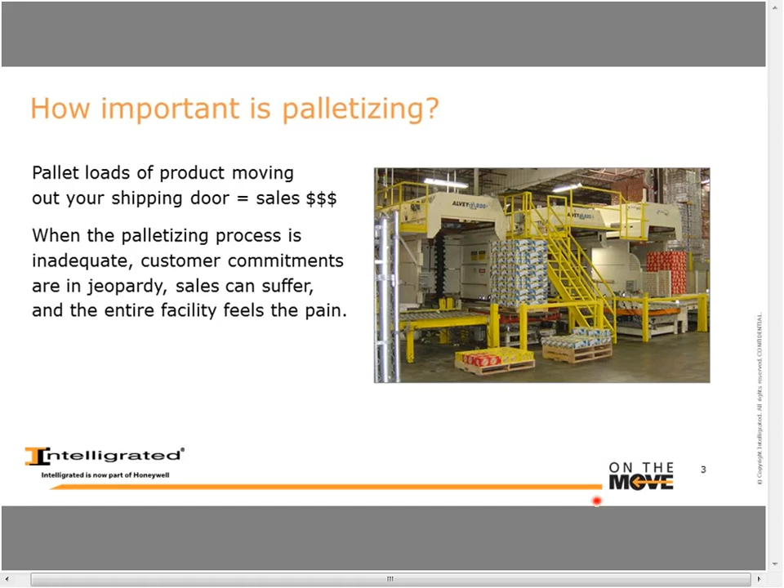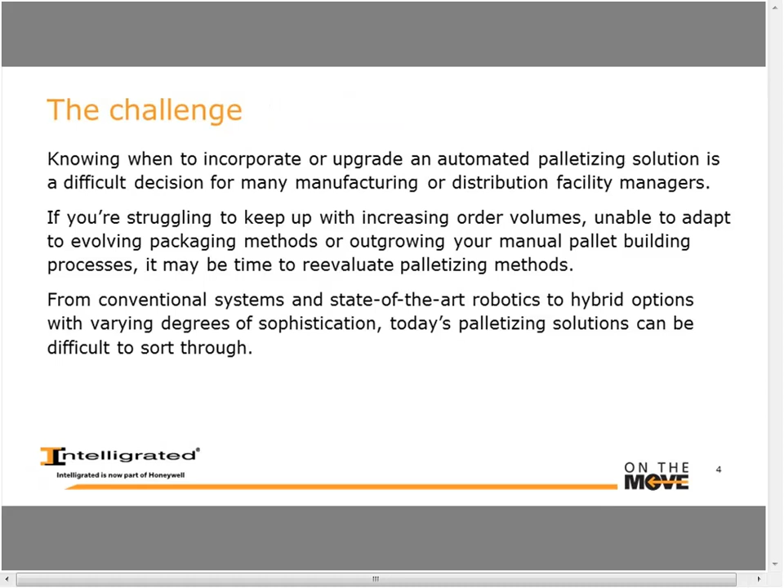So today's objective is to help give you a broader perspective and some things to think about as you're looking at either your existing palletizing operation or looking to upgrade. So the challenge is knowing what issues to focus on, how to approach an upgrade, and just simply recognizing that maybe palletizing is a hindrance to your existing operation. There's many choices today, from traditional, what we would refer to as conventional type palletizing machines, dedicated use machines. Certainly robotics plays a big role in palletizing today, and then we're seeing many applications for hybrid. We'll talk about all these in greater detail.

However, before we dive in, we'd like to hit you with our first polling question, just to get a little feedback from you. What is your current operation? Are you manually palletizing? Are you using conventional equipment, robotic? None of the above. So we'll take a few minutes. If you can click on the answer there and give us a little feedback, we'll share that with you so you as an audience can see what the prevailing solution is today. And one of the other things that we'll be talking about today has to do with if you're transitioning from a manual palletizing solution, what are the things you should consider for automatic palletizing, whether it be a conventional machine or a robotic machine. Exactly.

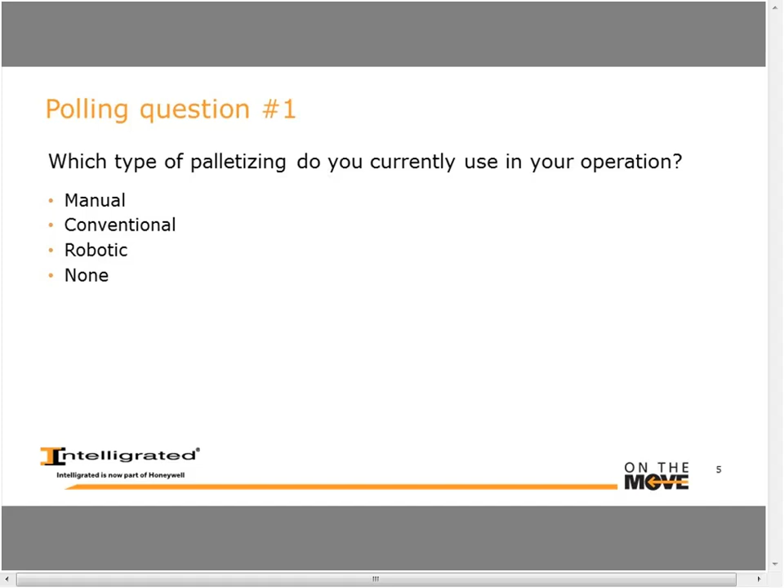And if you are manually palletizing today, as we'll talk later, there's actually some situations where that does make sense, but ultimately, wow, okay, 42% manual. I don't know if everybody can see the results on the screen, but we have 42% manual palletizing, 8% conventional, 8% robotic, and 42% none. So let's move on then to the presentation.

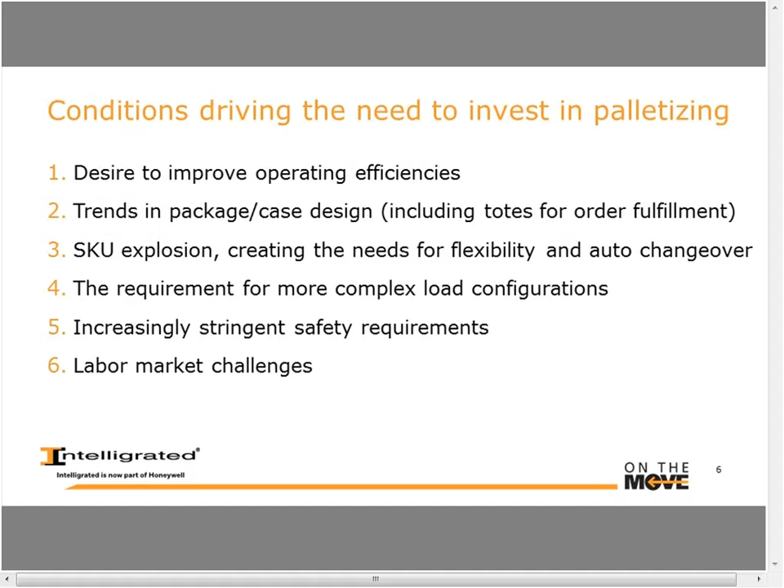First of all, there are any number of conditions driving the need to invest in palletizing. We'll talk about each one of these in a little bit more detail. The obvious one is desire to improve operating efficiency. I'm not going to step through all 6 of these here because we'll talk about each one in a little more detail.

The number one point I want to make is that when you're looking at a palletizing solution, you have to think in terms of a system. I've seen many examples where customers are dissatisfied with the current operation, and this can even apply to manual. If you have issues delivering the product to the palletizing cell or machine, it may look like a palletizing issue when really it's a system.

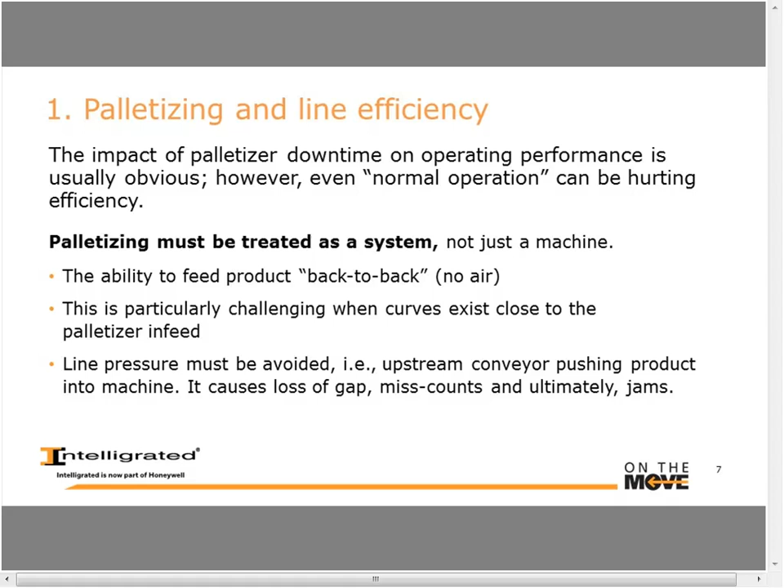For example, the conveying system must be able to deliver product back to back. That is, no gaps, no air in the flow of cases. A little bit of air can have a huge impact on performance. The layout is hugely important. If there's a curve right before a palletizer infeed, for example, that makes controlling the system very difficult and very tough to maintain that back-to-back flow. Accumulation line pressure can be deadly. So I'm bringing these up just as things to consider when you're looking at palletizing.

An analogy I like to sometimes use is think about yourself in a traffic jam and you're a case on a conveyor system. As you're approaching a stoplight, you see it turn red in the distance. You continue to travel for, say, 10 seconds before coming to a stop. Now the light turns green. It might be 10, 15, 20 seconds before you start to move again.

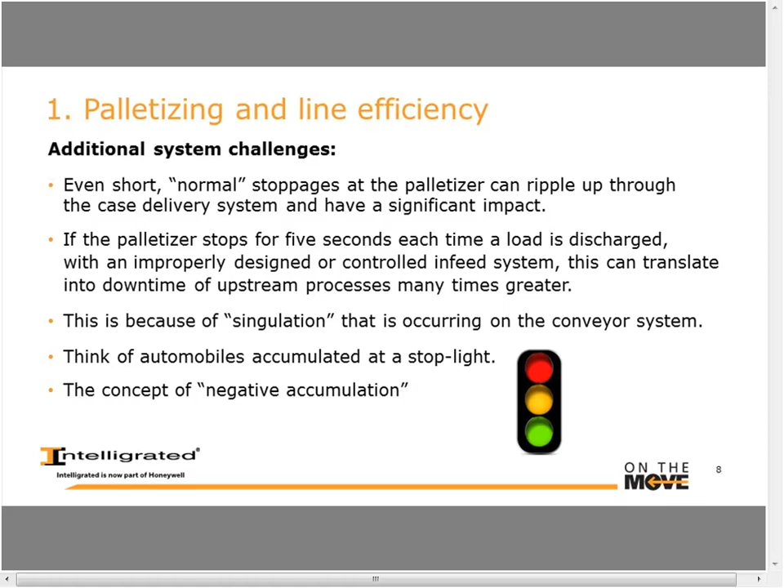This gets into the concept of what we call negative accumulation, where the time that you buy with accumulation conveyor is actually less than the time it takes to restart the upstream process. So in that situation, you're actually losing by having accumulation. It takes longer to get the last case of the train moving. So the most frustrating thing is you're at a stoplight, there's long cars in front of you, the light turns red again before you even start to move. Then you get a good idea what we're talking about with negative accumulation.

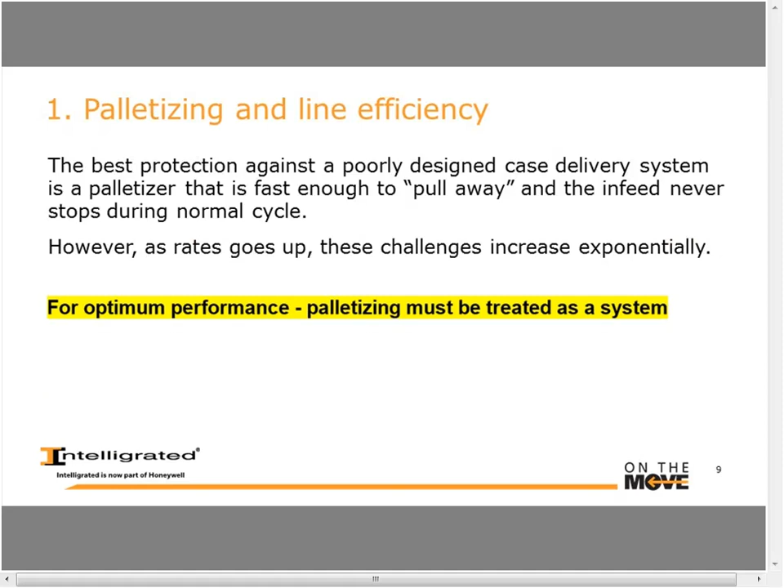So the point here is truly think about palletizing as a system. If you just focus on the machine or the robot, you could have a really good machine or a really good robot, and it's going to come up short in satisfying your needs.

So one of the interesting things here is, with the poll result being a lot of manual palletizing, this is a key factor because people can handle these wide variety of different packaging challenges really just inherently. People are very good at doing those things. To have an automated machine handle some of these more challenging packaging types really requires a substantial amount of expertise and a lot of different types of equipment to efficiently handle these things. So when you're considering moving from a pure manual operation to an automated solution, you have to take into consideration what types of product you're handling and the challenges associated with handling those products.

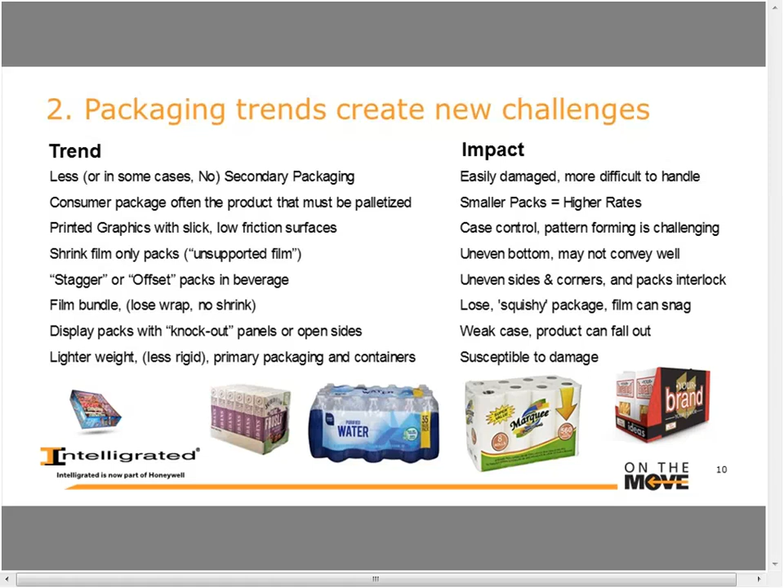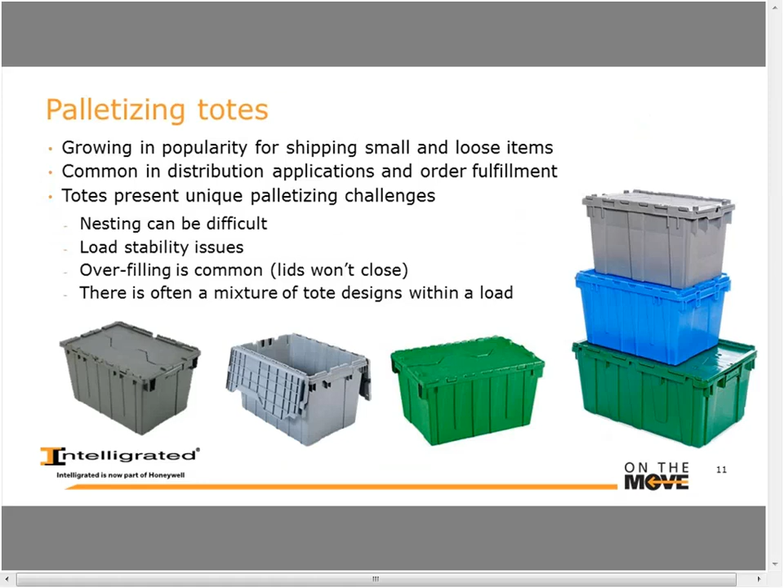Yeah, and Matt makes an excellent point, because many times today the product that is being palletized is actually the package that the consumer picks up off the shelf. So secondary packaging is virtually going away today. The other consideration is if you're in a distribution environment, we're seeing an increase in the use of totes for order fulfillment. Totes present some special challenges, and we'll come back to this a little bit later and talk about some of the viable solutions for palletizing totes, including sortation and order fulfillment.

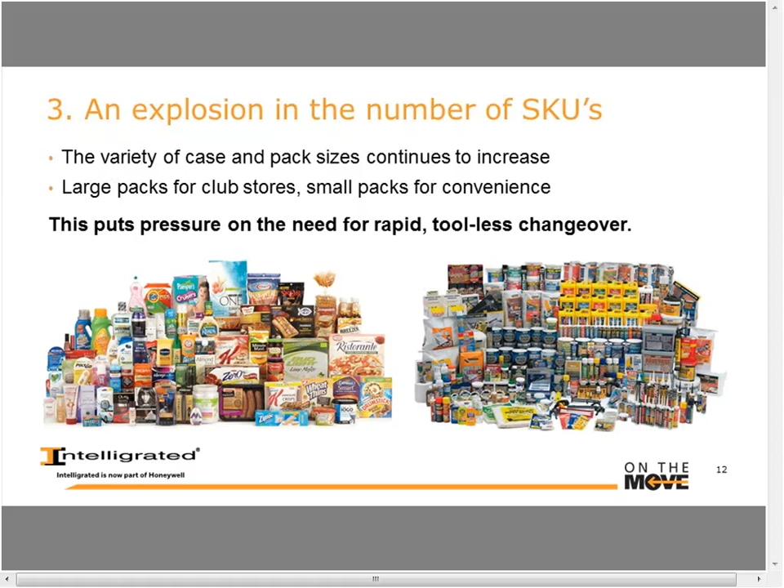It's no secret there's an explosion in the number of SKUs. This puts further pressure on your palletizing system, making rapid changeover, toolless changeover, very important. Otherwise, you spend your entire day adjusting equipment to handle other packages or other SKUs.

Number 4, because packaging is changing so rapidly, that's also having a big impact on the nature of the loads. The club stores want display loads that they can park at the end of an aisle. Very often there's a desire to have graphics to the outside of the load for display purposes. Because secondary packaging is becoming very weak or going away, often there's the need for additional dunnage in the load, such as tier sheets, slip sheets, corner boards, and then certainly labeling is very important today, tracking the product and having barcode scannable labels on every pallet load.

Yeah, again, just to re-emphasize, in a manual operation, a lot of these types of items are being addressed by the human workers.

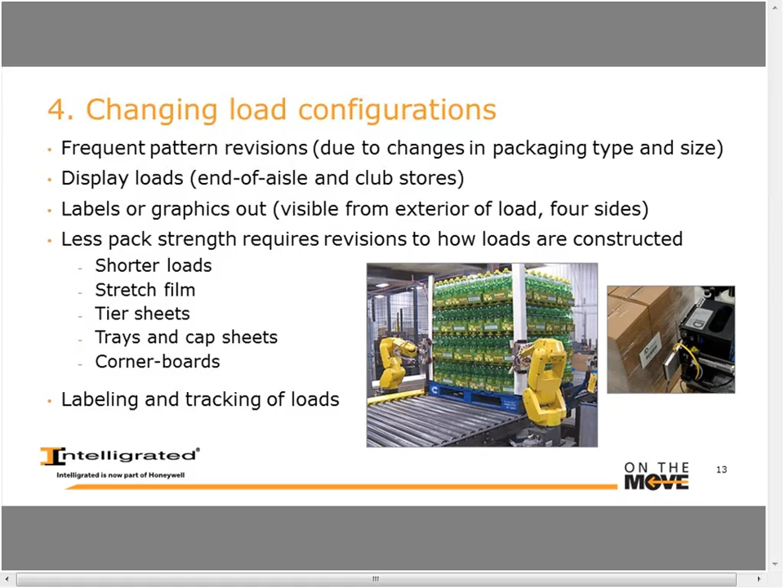Basically, all the wrapping, if there's any difficulty in handling and moving the loads around, those are all being handled by the individuals. So when you transition from that manual operation into handling those loads in an automated fashion, there's several other things that you need to take in consideration. Load stability, like what we're showing here in the picture, the corner boards are being put up there, automated wrapping systems, all those types of things really need to be considered as it relates to the load configuration.

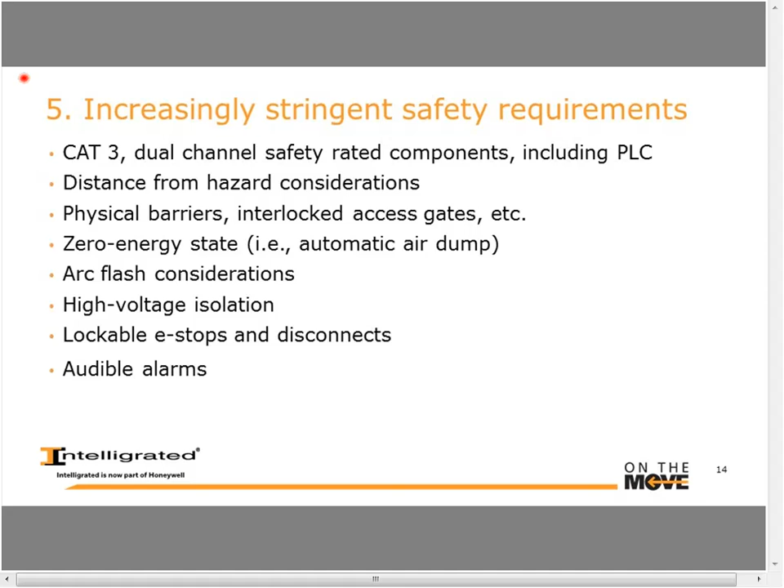One of the biggest factors today that we're seeing is evolving safety standards, not just industry standards, but many of you, I'm sure, have corporate safety standards that are evolving very rapidly. So equipment that may be perfectly functional, perfectly reliable, you're having to consider either replacing it or spending large sums of money to upgrade it. It's not uncommon today. We'll see situations where customers are having to spend $150,000, $200,000 to upgrade equipment. On the screen, you see a list of some of the typical things that are requirements today, and it continues to evolve and continues to become more stringent.

So the final item that we're seeing impacting a drive towards investing in palletizing is labor markets. Obviously, if you're manual palletizing, you know the challenges that go with that, availability of labor, the potential for increased minimum wage, and then certainly the availability. It's a job that people don't enjoy, don't like, and so keeping people on the job is tough. And then finally, there's always that risk of injury, particularly if you're dealing with a heavy product.

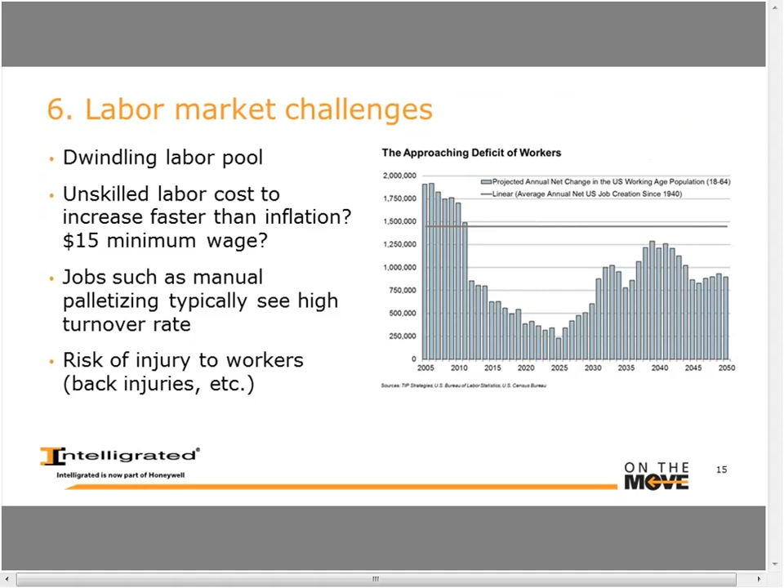Okay. Go to the poll. So let's go to polling question number 2. Of these factors, which are the ones that are driving your consideration to investing in or upgrading palletizing operations?

So I'll chime in here a little bit about the challenging labor markets. What we've seen is a lot of these labor markets are pooled around geographically dense areas, and so as retailers specifically are consuming a lot of those manual resources, a lot of the manufacturing facilities as well as the other retailers are struggling to find the labor to be able to manage the needs that they have. So automated palletizing solutions, and for that matter, other automated solutions, are becoming more and more viable.

So in fact, I was with a customer yesterday. You would think that desire to improve efficiency would be at the top of the list, as is the case here. 40% of you have said desire to improve operations. Interestingly enough, trends in packaging and SKU explosion rated fairly low here. We only had 20%. Between the two, this customer I was with yesterday, it was all about that. He sees an explosion coming at him, a wave. He knows his existing equipment can't handle it.

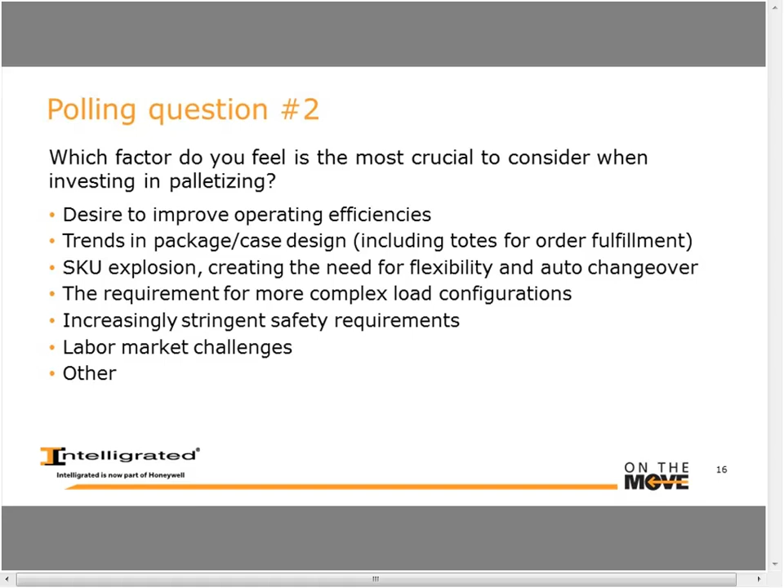So, which kind of brings up the point, maybe efficiency is your #1 driver today, but consider the future. Don't lose sight of evolving trends, the packaging changes that are going on, and the trend towards smaller packs in particular, whether it be in a DC environment or in a production environment. Packages are getting smaller and they are getting more fragile. So with that as a background, how do you satisfy this? All these objectives can be satisfied. The challenge for us and for you is to pick the right solution.

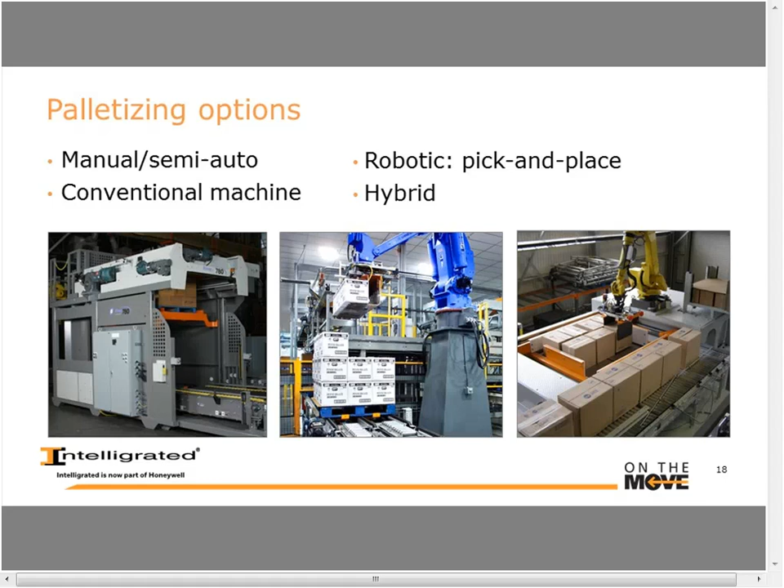So with that said, with technology today, there's many, many different viable approaches to palletizing. And manual is still a viable one in many situations, or some form of semi-automatic. But as time goes on, it's going to be more difficult to satisfy your needs with manual palletizing for the labor reasons we talked about, as well as certainly you want to increase rates, you want to increase performance. So we'll go through each one of these somewhat briefly.

On the manual side, there are advantages. It's scalable, it's flexible, it's relatively low cost versus investing in capital equipment. However, we've already talked about some of the negatives. Slow, inefficient, risk of injury, and so on. So the key on the automated side, it should be fast, it should be efficient, should be reliable, should be repeatable. And all those are true except if you pick the wrong solution. That's why I've got it in bold font there. You get the wrong solution, that's going to equal failure.

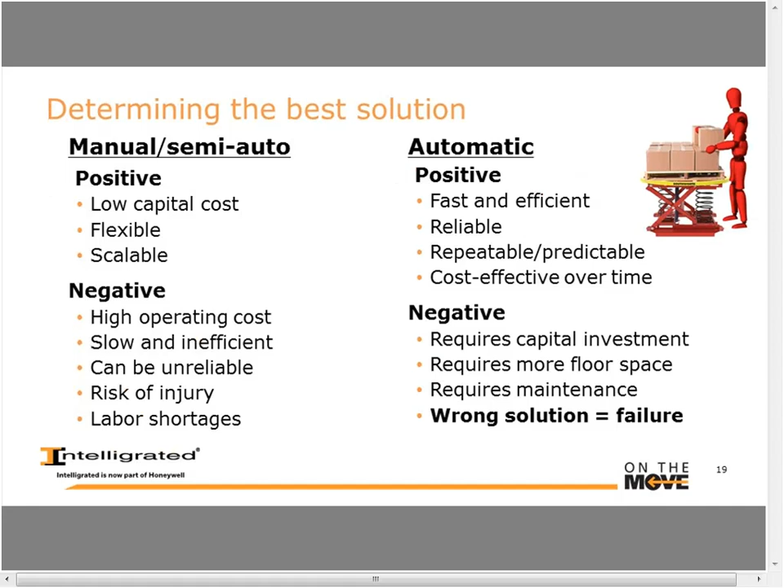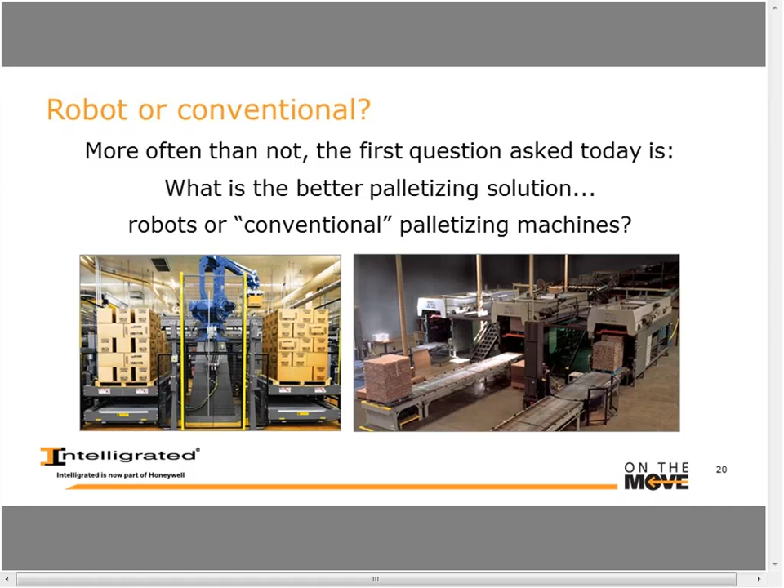And I've seen many examples where customers have invested in a robot, for example, and they consider it a failure because it's been misapplied. So we'll talk a little bit about robot application here in a moment. So with that being said, more often than not, the first question that the customer typically has is, what's the best solution for me, conventional or robotic? It's not necessarily an easy question to answer.

There's a lot of parameters, a lot of variables that go into it. But just for the sake of understanding, let's talk about what we mean with a conventional machine. There's two basic forms of pattern formation, two methods of creating pallet loads.

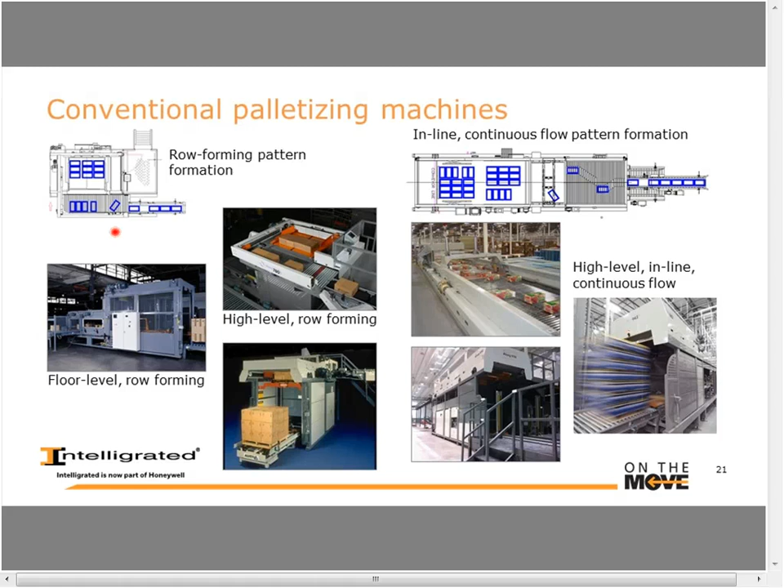One on the left side of the screen, what we call conventional row forming style, where a flow of cases is fed in. I apologize for the size of this diagram, but if you look at it here, a row is formed, cases are turned or not turned, and then one row at a time, we sweep that row out onto what we call a stripper plate or an apron and deposit it onto the pallet load. Pretty simple concept, very, very easy to understand, very reliable, very flexible. However, it's somewhat speed limited.

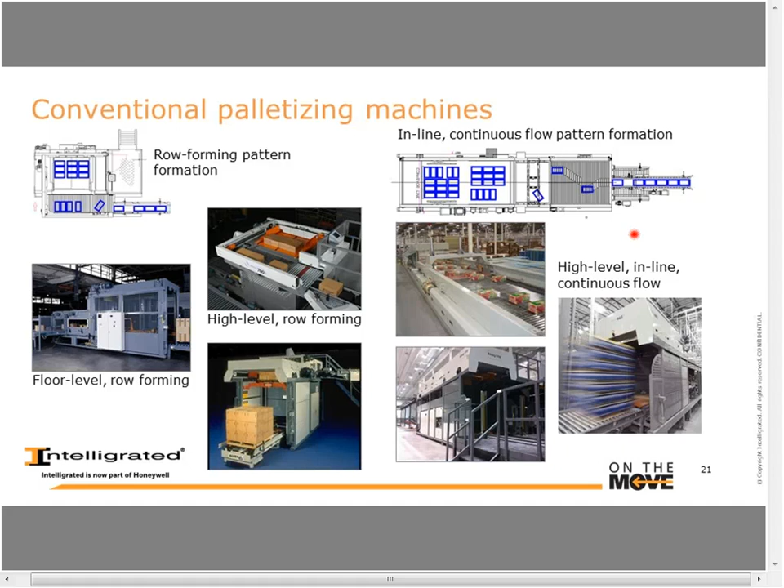If we get over here on the high speed in-line, it's a continuous flow. Patterns are formed as product flows through the machine, much higher rates, however, not as pattern flexible, not as product flexible necessarily as a row forming style machine.

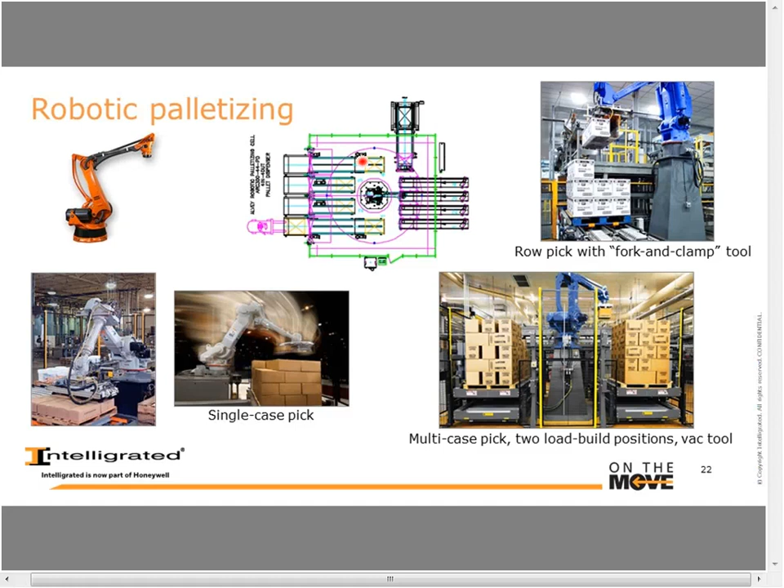So then we look at robots. Robots have huge flexibility, which is both an advantage and a disadvantage. On the disadvantage side, the layout, there's no end to the layout. So one of the tricks with a robotic solution is to come up with the right cell design. In the middle of the screen, you can see an example of a simple 4-in, 4-out cell, which illustrates one of the advantages of a robot. I can palletize 4 different products, 4 different SKUs simultaneously without the need for accumulating full pallet loads of product, for example.

Yeah, this is really advantageous if your manufacturing facility has a lot of different products that you're needing to palletize, but not any one in particular has a very high volume. And so what you're able to do with this, coupled with sortation systems upstream, would be to send an individual SKU down one particular lane and palletize it as it's being produced and delivered to the cell.

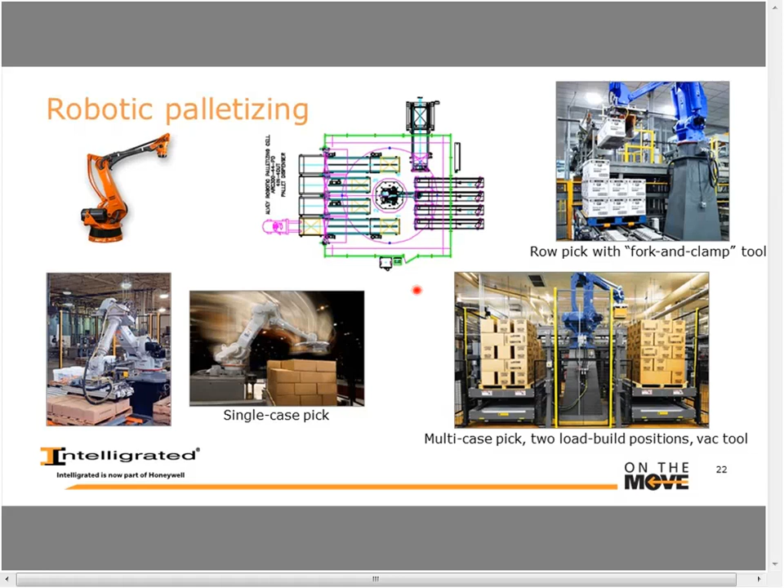And then some of the pictures here, a little hard to see the tooling, but the end of arm tooling is really key in effectively getting the most rate out of the robot, and we'll talk about that as we get into rates here. So how do you decide?

First thing is really look at the application. What are the products being handled, construction of the cases, dimensions, and then certainly rate. What palletizing rates do you have to achieve? The number of lines to be palletized. Load requirements. Do you need corner boards? Do you need tier sheets? What are the patterns? And then don't overlook facility considerations, the footprint, the size of the layout, and then personal preference. You may just have a comfort level with a particular technology.

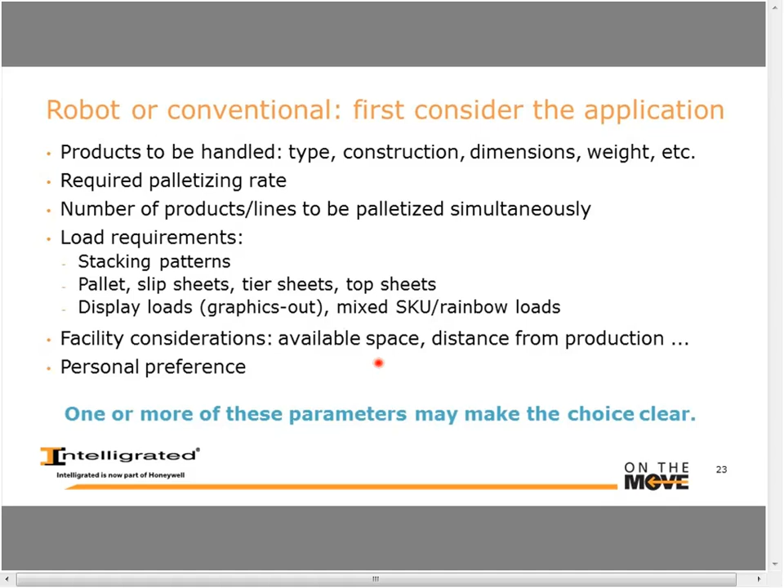Sometimes one or more of these criteria make it simple to decide, but not easy. Sometimes it continues to be a tough decision. But again, coming back, don't overlook the fact that it is a system. You got to think about the conveyance methods, the conveying equipment, how you're going to handle those products, how you're going to accumulate them, how you're going to get it to the palletizing cell reliably without product damage.

Yeah, to the point here, it's not necessarily just about the act of putting an item onto a pallet. It's all of the mechanisms to get the pallet into the machine, what the slip sheet requirements are, as well as upstream requirements of conveyance and sortation into the palletizing system.

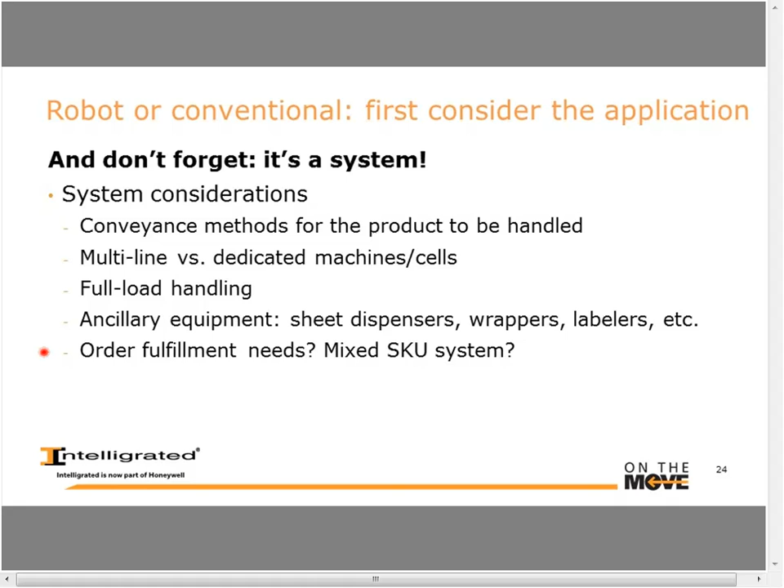And as we get into palletizing in the order fulfillment and the distribution environment, the system takes on even that much more critical importance, because sometimes we have to sequence the product, you have to sort by order, and the system is really the key in that respect.

Talk about rate, just kind of a high-level overview. Generally speaking, in a palletizing application, an industrial robotic arm can cycle 6 to 8 cycles per minute. Depending on how many units can be handled at a time, sometimes we can pick up 4, 6, 8 products, so you can do a rough calculation and get kind of a nominal idea of what type of rate you can achieve with robotic palletizing.

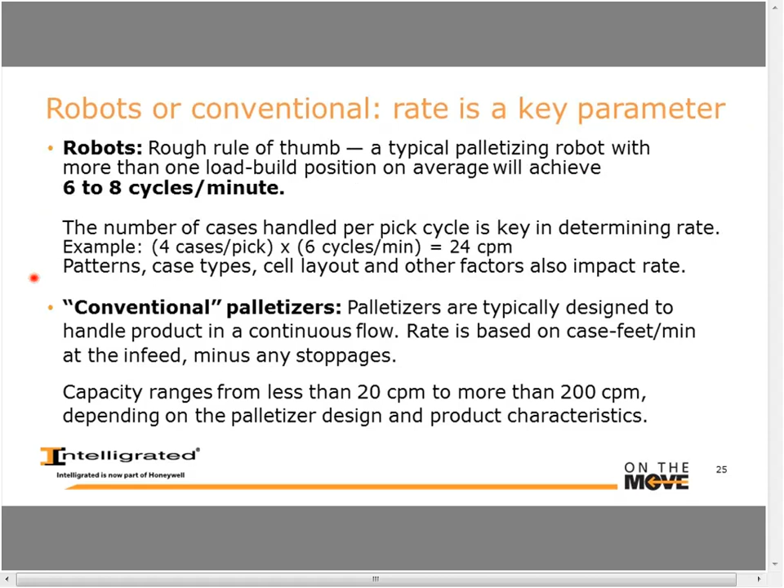Conventional, the rate range is large, ranging from 10, 20 cases a minute all the way up to 200 plus cartons per minute. So factors that would traditionally steer you in the direction of a conventional solution, rate being primary concern. Usually if it exceeds 30 cases a minute, I start thinking, well, maybe this is not a robot solution, maybe it's conventional. That being said, that's not a hard rule. The numbers vary tremendously. We have applications where we're doing 70, 80 cases a minute with a pick-and-place robot. But that's where rows are being formed and we're picking up 6, 8, 10 cartons at a time.

Robots are known for flexibility, and they are flexible, but only as flexible as the end-of-arm tooling. So in many applications, the conventional machine can actually offer you greater flexibility if you're handling display cases, cases that don't provide a good surface for picking up with a robot. So you've got to think about the long-term flexibility.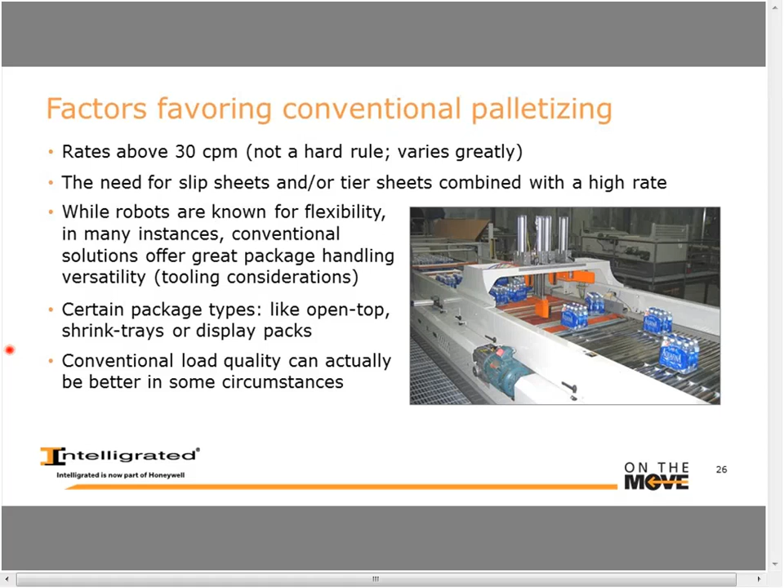And beyond that, load quality. Sometimes, again, depending on the nature of the product, you can actually get a little bit tighter load, better load with a conventional machine because of the compression dams, and we're actually squeezing the layer as it's being deposited onto the pallet.

As far as robotic palletizing, absolutely, if you have multiple slow-speed production lines, it's almost a no-brainer. Robots are clearly the way to go, because with a conventional machine, while you can satisfy and service multiple lines, you have to accumulate full pallet loads of product and release it to the machine in what we call a multi-line type application.

If the rates are low enough, another advantage is the robot can pick the pallets, put them in place, handle tier sheets, so you're saving equipment by having the robot handle the materials that go into the pallet load. And then items like bags. If you're palletizing bags today, a robot is absolutely the way to go. It's not uncommon to get 20, 25 bags a minute out of a single robot.

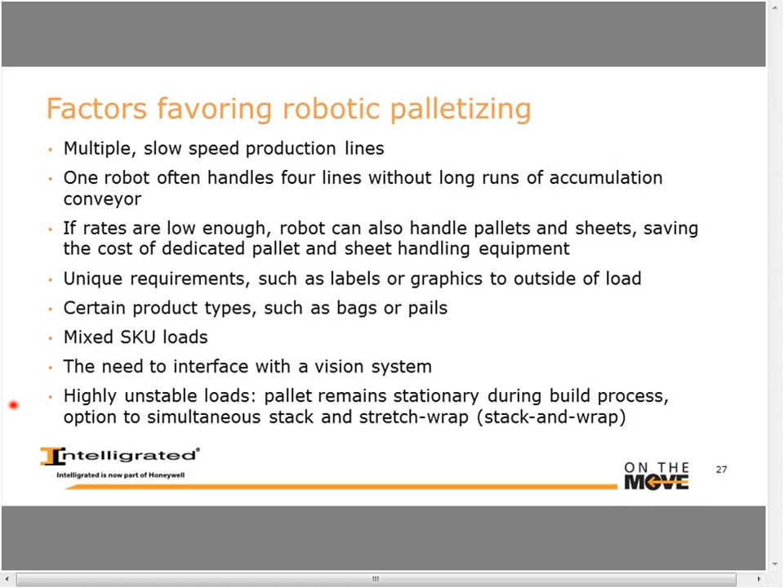And then if we get into vision-related applications, mixed load palletizing, depalletizing, where vision comes into play, the robot is absolutely the right solution. The final bullet there, we'll talk a little bit in a minute about very unstable loads. The robot gives you a very good way to stack and wrap the product simultaneously by literally stacking loads on the turntable of a stretch wrap machine.

So one of the key things, if you decide, okay, robots for me, that's how I'm going to do it, you've got to pay attention to the integrator. There are hundreds, literally thousands of companies integrating robots. Not all robot integrators are created equally. Matt and I could decide tomorrow we're going to be robot integrators. In Matt's garage, we'd throw a robot together and put a vacuum tool on it, and we're in business. You've got to be careful about that.

Size does matter. You've got to make sure the company has the resources to support you. And look for RIA certification. Maybe you want to expand on that a little bit, Matt. Yeah, the RIA has a certification program that qualifies the robotic integrators through a series of tests and criteria. Essentially, it's establishing a higher level of comfort for individuals or companies purchasing robots, that their integrator is qualified and competent beyond just what you hear from the integrator.

So let's talk about hybrid solutions. The hybrid can kind of give you the best of both worlds. It takes robotic technology, combines it with conventional, and the idea is to capitalize on the strengths of both solutions. Now, usually a hybrid solution is more expensive. And by the way, this applies not just to palletizing. You see it in case packing, stretch wrapping, any number of technologies. And it can make sense beyond just the coolness factor that comes with it.

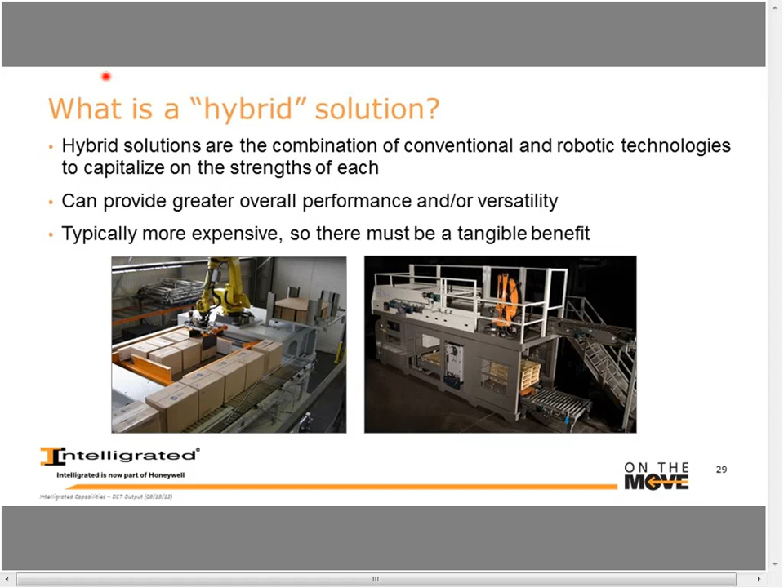Hey, Frank, can you give an example of a product that would lend itself more towards a hybrid palletizer versus a conventional or robotic? Absolutely. When we get into packages that are very small, very unstable, very fragile, forming those difficult patterns on a conventional machine can be quite difficult, and sometimes the package handling reliability is not there. So a hybrid offers the precision and repeatability of the robot, along with the speed capability and layer handling capability of a conventional machine.

So certainly repeatability, flexibility, accuracy, those are all factors that go into considering a hybrid solution. Another benefit is we see many examples today where customers want a particular side of the package on the outside of the load, either a label or graphic display. The robot or the hybrid gives that capability basically free. It's built in, whereas on a conventional you're going to have to add additional hardware to the machine to achieve the label-out orientation.

Another advantage of either robotic or hybrid is that we have software, and Matt, I think you're going to touch on this, that allows the end user to program new patterns through the HMI. You don't have to come back to the manufacturer. The software allows you to add those new stacking patterns.

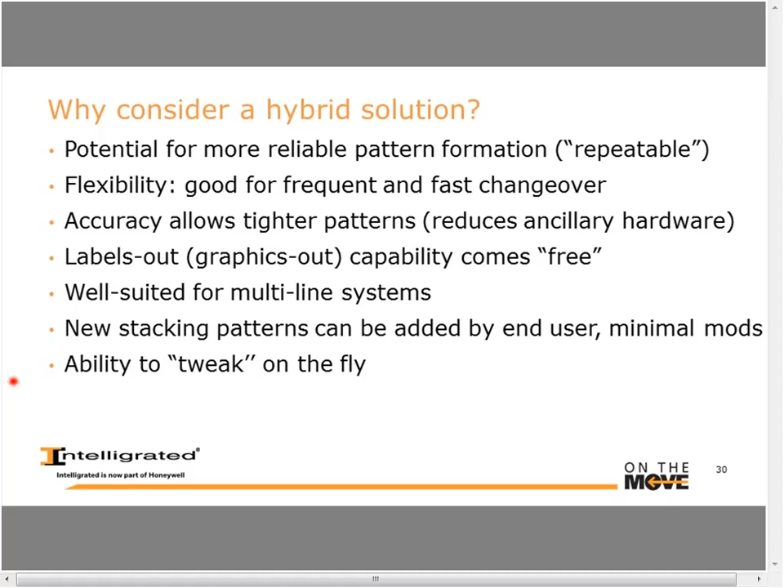And the patterns can be tweaked, I say, on the fly. So if a particular package is not handling to your liking, adjustments can be made right through the HMI as the machine is running to dial it in with the precision that is needed.

Here are a couple of photos just to illustrate, and up in the upper left-hand corner is a pick-and-place robot stacking onto the apron of what would otherwise look like a row-forming style palletizer. The advantage here is you get label-out orientation, you get a nice tight load because of the squaring dams on the machine, and at the same time the robot can apply the tier sheets between layers as needed.

Here's what I kind of call a King Kong size hybrid machine, a pair of FANUC robots on a high-speed inline machine handling very large boxes of beef with the ability to put the labels to the outside and actually build mixed loads, order fulfillment loads at a very high rate. I might mention that the robotic technology can either be industrial arm like a FANUC or a dedicated use gantry type device, and that really kind of comes down to personal preference.

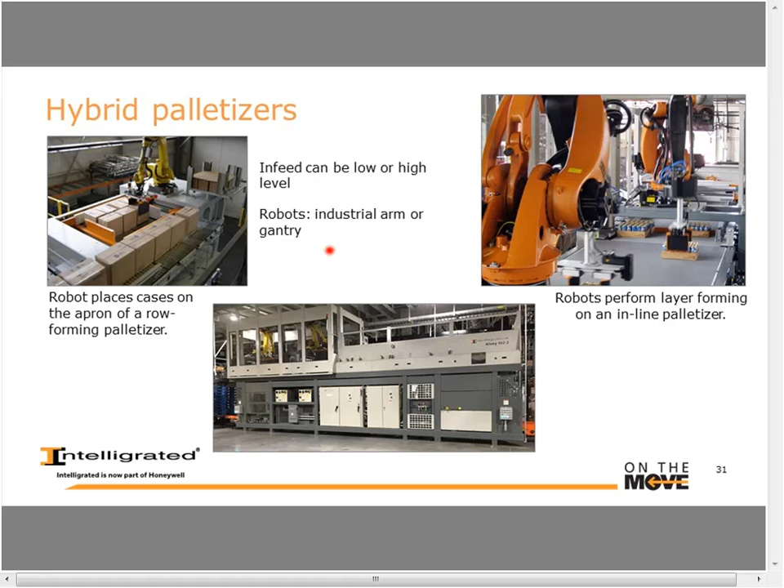So when you say order fulfillment load, what you mean by that is a specific set of products are dedicated for a particular distribution channel, like you're building a pallet out for a particular order with a known set of products on that pallet. That is exactly correct. The mixed load, mixed product, mixed SKU, and even mixed case sizes, and the hybrid gives you that capability.

So I'm going to put this chart up, and you say, well, golly gee, you're kind of talking rates, you're talking footprint, talking flexibility. Where do I start? Again, I'd start by looking at the rate. Now, this chart is not intended to be the ultimate guideline in terms of what the capabilities are of these various solutions. It's simply to give you an idea of what the capabilities are.

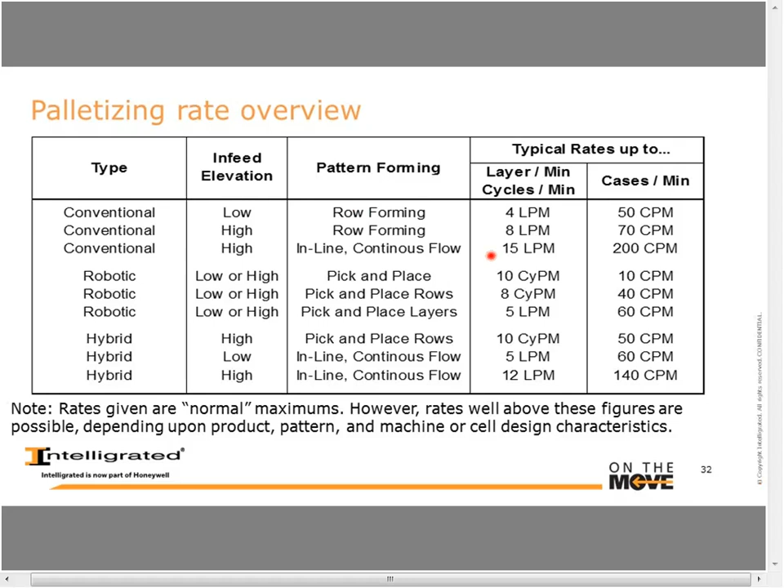So for conventional, low in-feed elevation, we're typically talking in the range of 4 layers per minute at maximum. You go to a high-level row-forming style machine up to maybe 8 layers per minute, or in terms of cases per minute, 70. With the high-speed inline, we see applications where we're doing 15 up to 20 layers per minute, or 200 packs per minute.

Robotic, pick and place, again, think in terms of 8, maybe 10 cycles a minute for a really tight, well-laid-out cell. But again, to try to define that without looking at the specific application is very difficult. And then we get into the hybrid solutions. So you can use this as a reference, but certainly don't make any investment decisions based off this chart.

So another one of the things we talked about earlier was the different packaging types and other product requirements, and so those are all also impactful to the rates of all of the different types of machines that you've talked about here today. So back to emphasizing on selecting the right supplier or integrator for these solutions is you've got to take all these things in consideration when engineering a robotic palletizing solution.

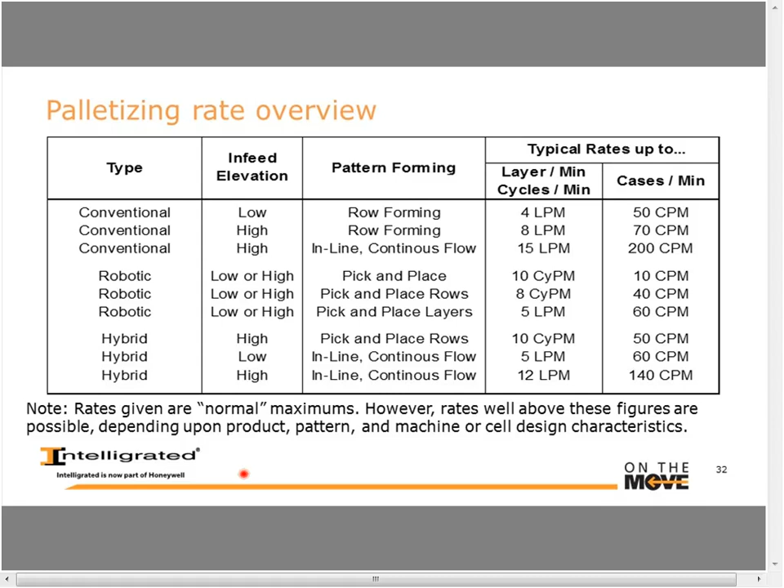Absolutely. So a couple other things. I haven't mentioned cost. Usually that's at the top of everybody's list. Well, what's it cost? If you say, well, what's the robot cost? What's the palletizer cost? It depends. There are a million variables that go into that, the system being one of them. So you need to look at the entire solution. Sometimes they come out darn near equal. Robot, hybrid, conventional, because of all of those variables, you put it in the hopper and it comes out where the cost is nearly identical.

So then what do you do? Well, look what's going to serve you best long term. For your environment, your building, existing equipment, what are the capabilities of your facility in terms of maintenance operation? Are your people well skilled in robotics already? Then robots would be a simple decision. If you're more into PLC technology and just conventional machinery, well, then you might want to lean in that direction.

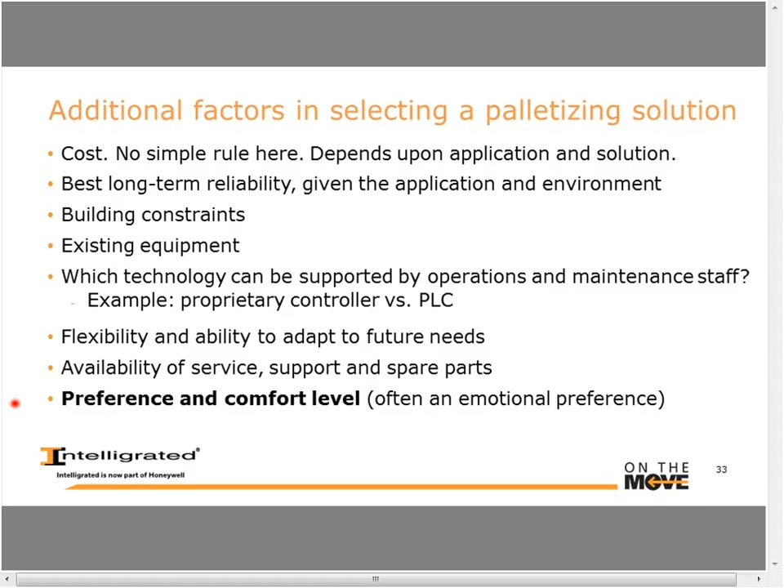Again, don't forget about future needs, flexibility, and then long-term support. As Matt was talking about the integrator, can you get that support and upgrades and so on for your equipment long-term? Sometimes it just comes down to this, the comfort level that you have. It could come down to a gut feeling. What do you feel serves your needs the best, if all other factors are equal?

Yeah, so one other thing that I wanted to chime in here is the first bullet point you have is cost. Also focusing on the value that you get for that cost, because there are a wide variety of different costs associated with palletizing solutions, and certainly there are some very low cost but low value solutions.

And so compare not only just the cost but also be very detailed on the different functionalities and the different features associated with the different solutions that can be provided, because even though the low cost may be low cost, it might not really get you what you need.

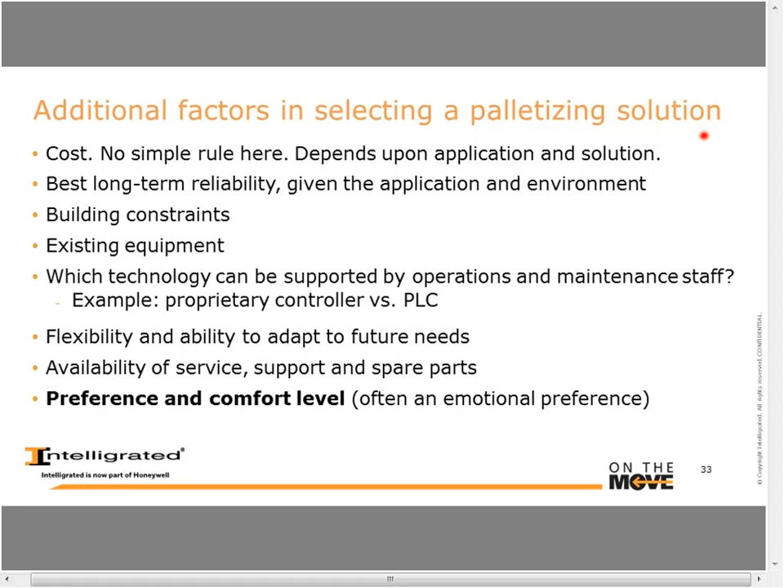So, Matt, that is a great point. And we've seen many, many examples where someone decided to go with their low-cost solution only to be stung long-term by that. Yeah, and not recognizing a lot of those challenges that you've articulated here quite nicely. If you don't recognize and don't build those into the solution, you can get that low cost, but the value is not going to produce the solution that you need.

Exactly. So order fulfillment, we'll say a few things about this. Palletizing in a DC, order fulfillment. I mentioned earlier that we're seeing an increase in the use of totes. Totes provide a great mechanism for shipping goods that are in a picking operation. What we typically do is sort by orders into buffer lanes and release those orders to a palletizer.

Now, on the surface, myself included, I'd immediately start thinking in terms of robots when I stack totes. However, what we find, given the rates involved and some of the challenges that go with tote handling, actually the conventional machine has some distinct advantages. So while we've palletized totes with robots, typically we will apply a conventional solution.

This is a very small illustration, but just to show you, what we have is a sorter, high-speed sorter, come off into buffer lanes, accumulate by order, and then release those orders to a central palletizing area. And those orders or those loads would receive a label that would be applied to the load.

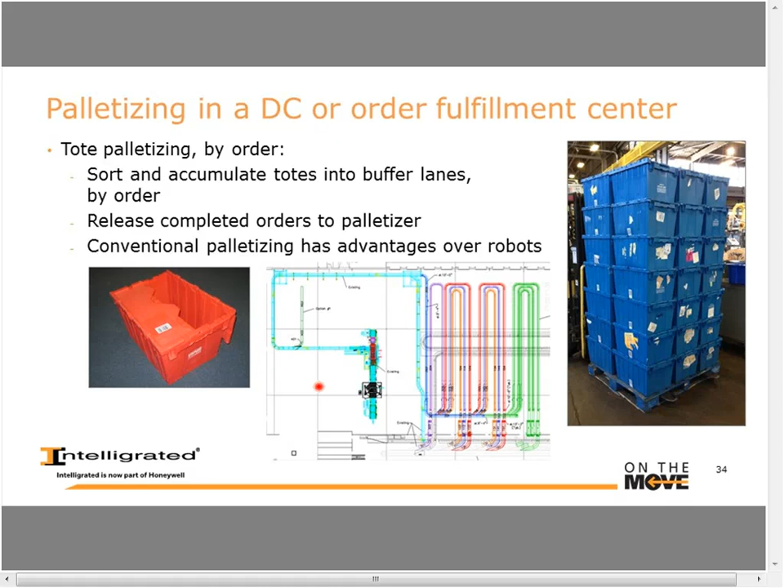So if not totes, in an order fulfillment or distribution environment, the holy grail is mixed SKU, and that can range from very simple uniform case size, but different flavors, different colors, or whatever. Conventional machine can handle that just fine, as well as rainbow loads, where each layer is different, similar to the meat distribution job that we showed you a minute ago.

But we mix within a load. Taking it up a notch in terms of complexity, sometimes we'll use what we call starter loads. So the first 2 or 3 layers may be homogeneous based on the order, and then stack the cats and dogs on top, either manually or automatically. And then we work our way up all the way to total mixed random loads, where the technology exists, but the system cost can get up there pretty good.

So we're still, I'd say, in a time frame here where ROI can be difficult, but as technology continues to evolve, labor costs can continue to go up. We are seeing viable applications for total mixed SKU palletizing.

Yeah, as Frank mentioned here with the mixed SKU palletizing solutions, generally speaking, there is a lot of additional hardware beyond just the palletizing piece to make that solution come together in an entire system. You've got ASRS, you've got depalletizing solutions, you've got order release modules, and then you have some complex stacking algorithms to actually be able to generate that. So generally speaking, those are very high volume, very, very costly systems.

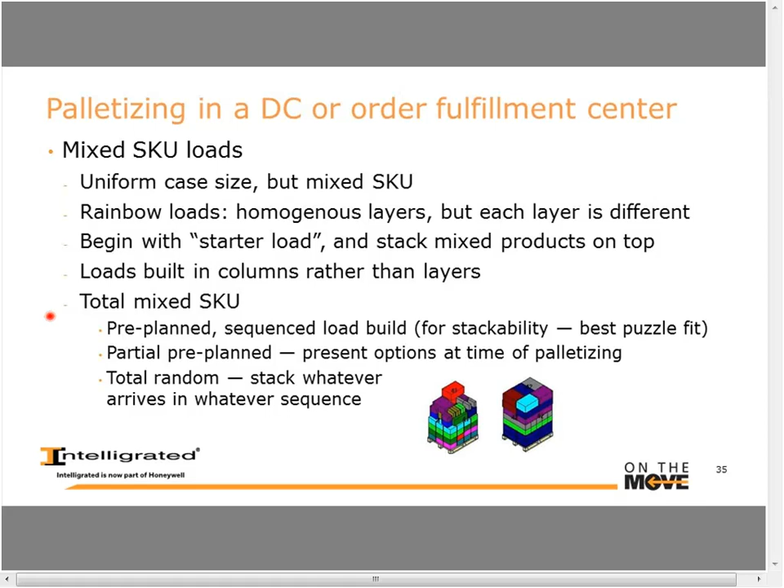Those scenarios are generally large companies that would merit that. It's not like you're going to have somebody that's going right from a manual palletizing solution into a complete mixed load order fulfillment solution. Now, with that being said, there are ways to improve.

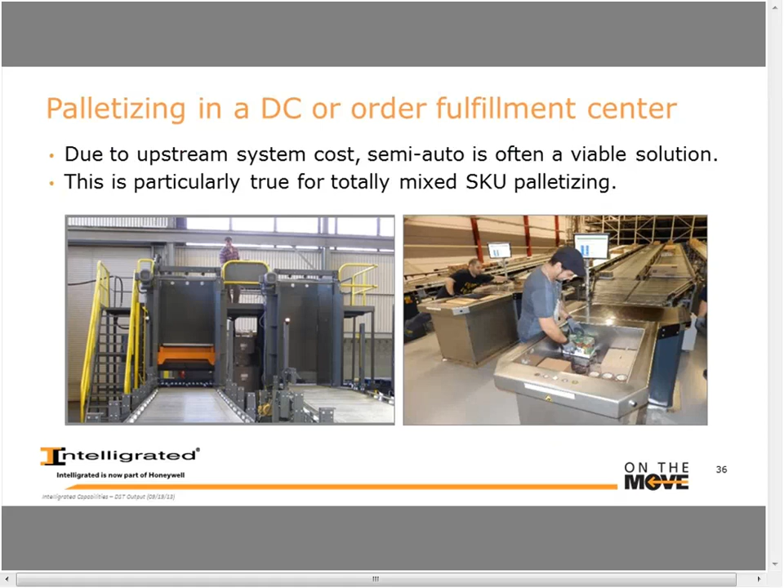Let's say you say, yeah, I've got to continue to manually palletize because I got total random. I just can't afford the millions of dollars that are going to be required to automate my palletizing. However, you still typically start with donor loads that have to be broken down, so maybe just automating the depalletizing side is the way to go.

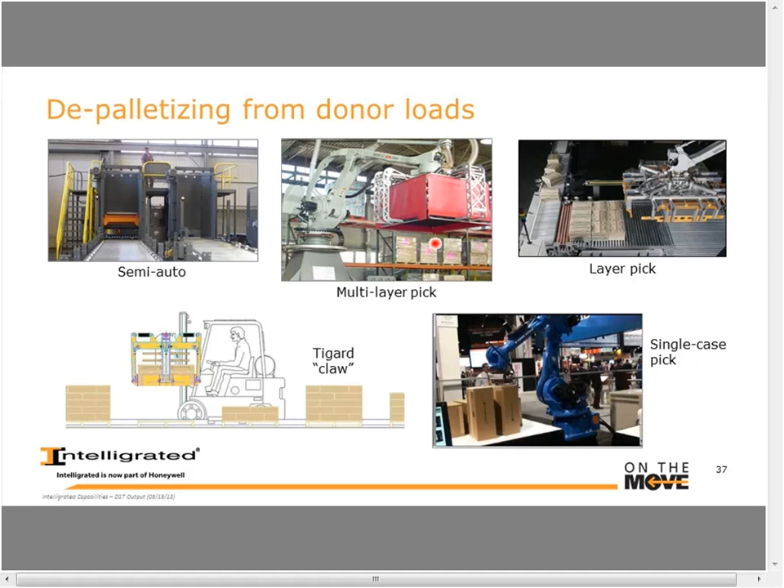So if I step to this slide here showing different methods of depalletizing, ranging from a semi-automatic approach to picking multiple layers off and unscrambling those layers, or even a vision-guided single-case depalletizing type operation. Yeah, we could do a whole webinar series just on depalletizing alone here. That's exactly right.

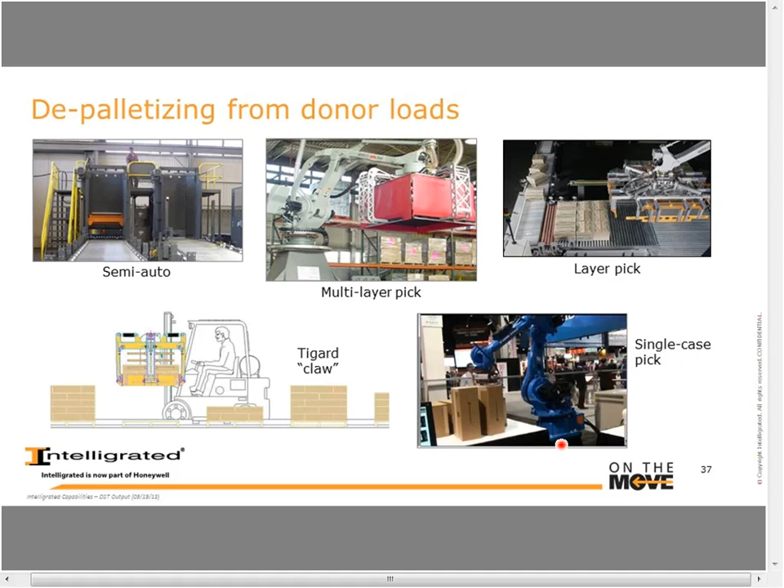So we've mentioned software a couple times. Let's talk a little bit about the importance of software and some of the options that are available. Yeah, so one of the considerations that you have when you're evaluating these palletizing solutions is a common user interface versus a dedicated user interface.

A user interface is, generally speaking, set up to configure your pallets and configure your products. There are solutions out there that have offline software that allows you to configure your pallet loads. Other solutions out there have a very cohesive, integrated solution to allow you to configure your pallet loads and your layer types on the machine itself.

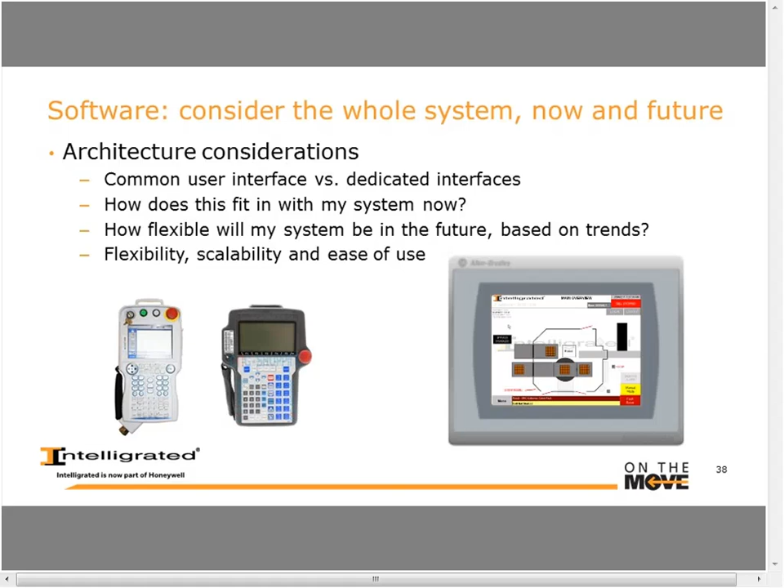As I mentioned before, too, the integration of the software with the WMS or WES is very critical to the overall application. As we mentioned with mixed load palletizing, it's not just a matter of putting the mixed load product onto the pallet. That's the tip of the spear. The remainder of this is all of that integration with that software to provide that solution.

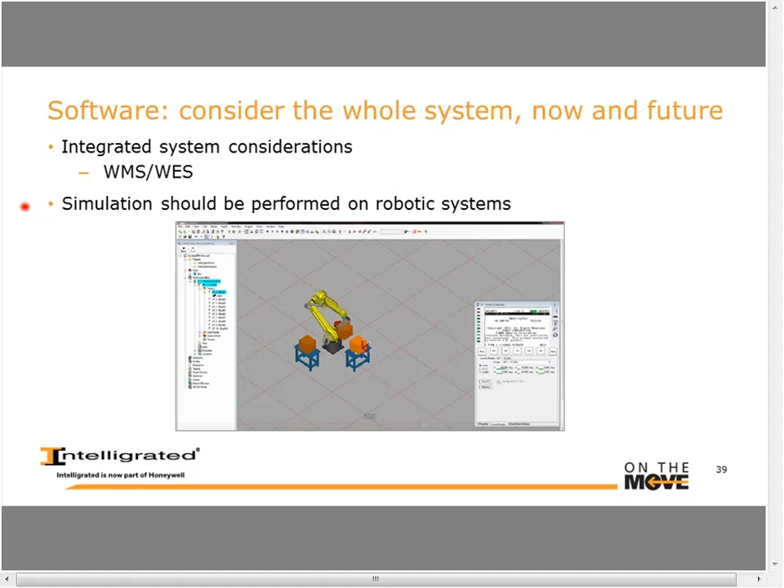And the ability to simulate as you get into more complex, whether it be robotic, palletizing, or mixed load, simulation is a key capability, which goes along with selecting the right integrator. Yeah, absolutely. Generally for lower slow speed applications, you may not necessarily need to do it on every single solution, but when you're pushing volumes and pushing rates on these things and there's any doubt that you're going to be able to do it, having a software simulation performed on your solution is very valuable and can lead to some very insightful information.

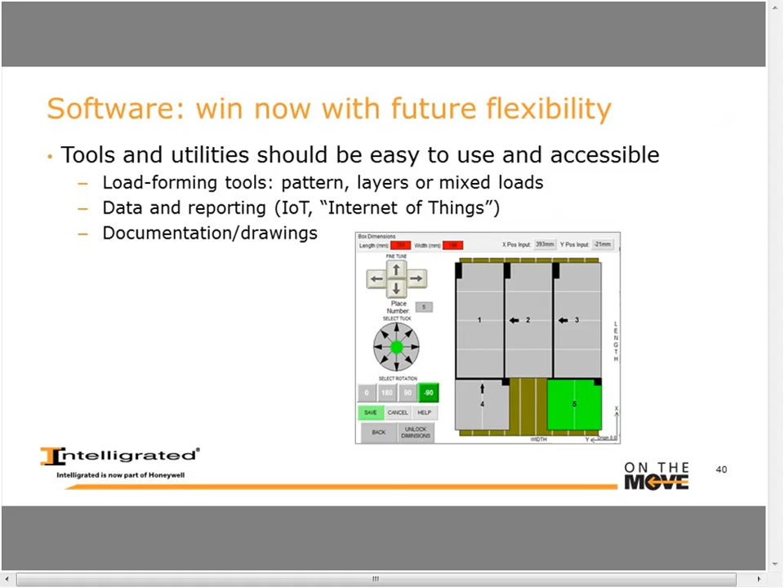One other item that's been in the trade magazines and whatnot is the IoT capability of pulling information out of machines and doing data. IoT being Internet of Things, right? And so having the ability to provide useful and valuable information to the operations and maintenance is very valuable.

And then other considerations, we'll look at maintenance and operations: do they have the ability to support the system? This gets back into that software again for configuring pallet loads. Now, as your patterns change moving forward, or you have a new product that is introduced that you didn't know about when you first purchased the palletizing system, do you have the ability to go back in and expand the capabilities of your machine, or do you have to go and add a lot of new hardware, or have to have some complex software to be able to handle this? So those are things that you should be thinking about as you move forward with the palletizing solution.

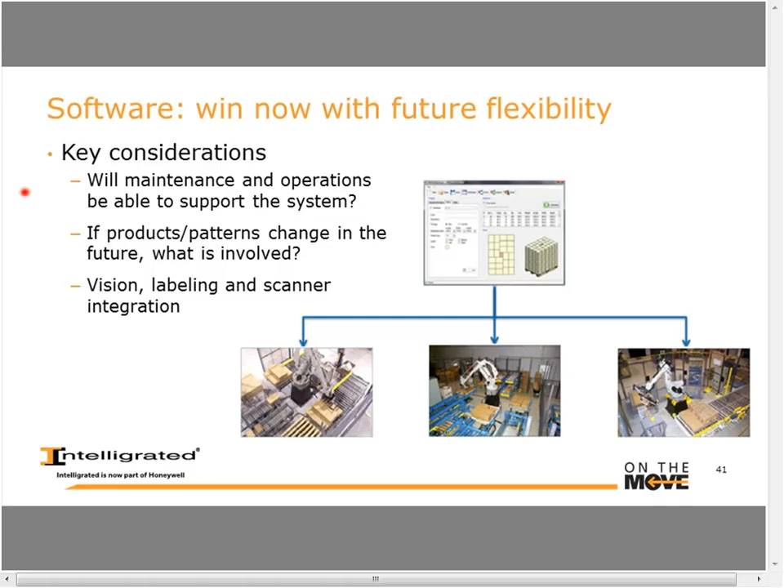So that's our quick high-level overview of palletizing. Going back to that first polling question, many of you are, I think it was what, 40% manually stacking today. Hopefully we haven't scared or intimidated you. The reality is it's not rocket science. The fact of the matter is, particularly with conventional machines, they're pretty simplistic, and the greatest compliment from a customer is when they say to me, your machine's so simple, there's nothing to it. That's the way we want it. We want it to be simple. We want you to be comfortable with it.